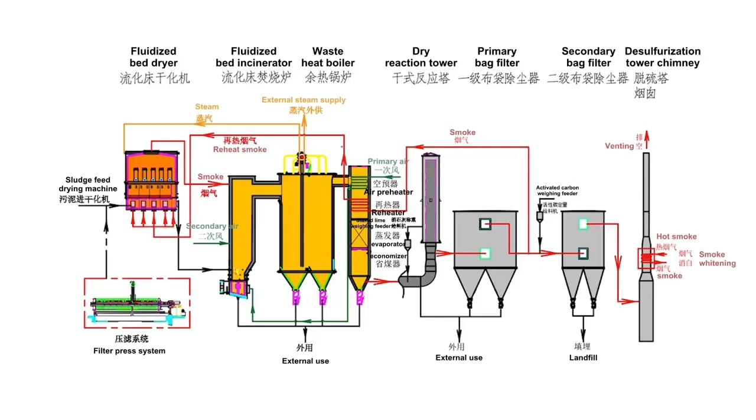Zhongding Environment, a one-stop solution provider for sludge resource utilization. The main sludge treatment process route adopts a process of drying, incineration, and flue gas treatment. The entire system process.

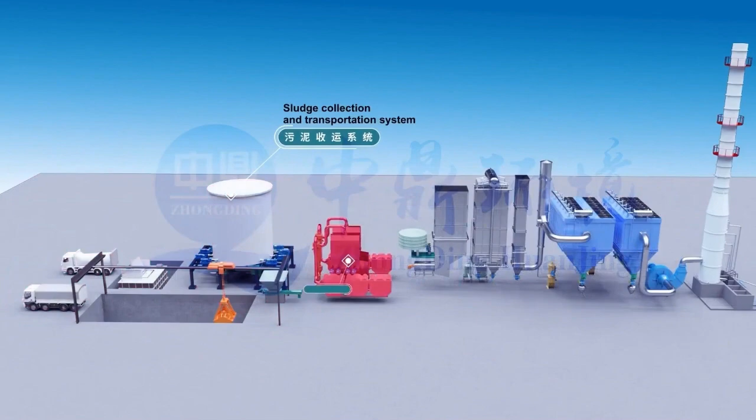Process system, including sludge collection and transportation system, sludge drying system, sludge incineration system, waste heat utilization system, flue gas purification system and more.

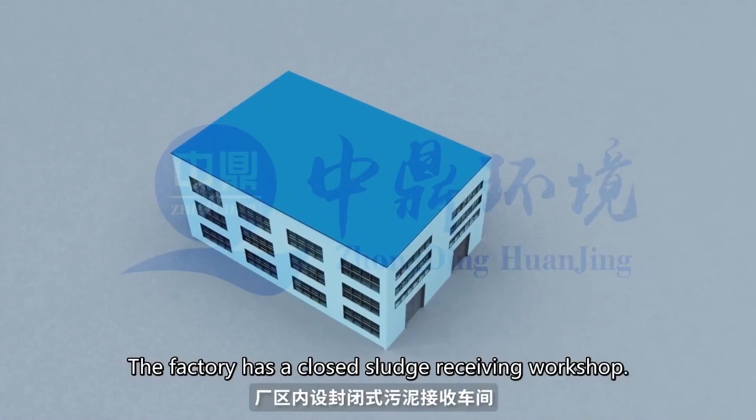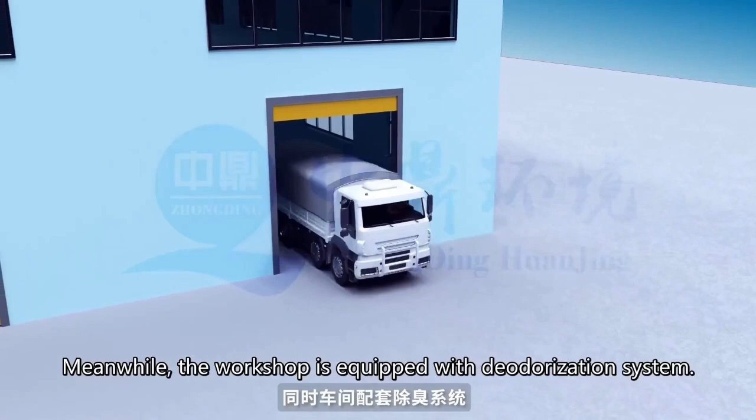An enclosed sludge receiving workshop is set up inside the factory area. Depending on the moisture content of the incoming materials, sludge collection systems are installed for both 80% and 60% moisture content, with the workshop equipped with a deodorizing system. When unloading, 60% moisture content sludge is stored in the material pit temporarily. Equipment like a grab bucket, sludge receiving hopper, scraper conveyor, etc. is used to transport sludge to the drying system.

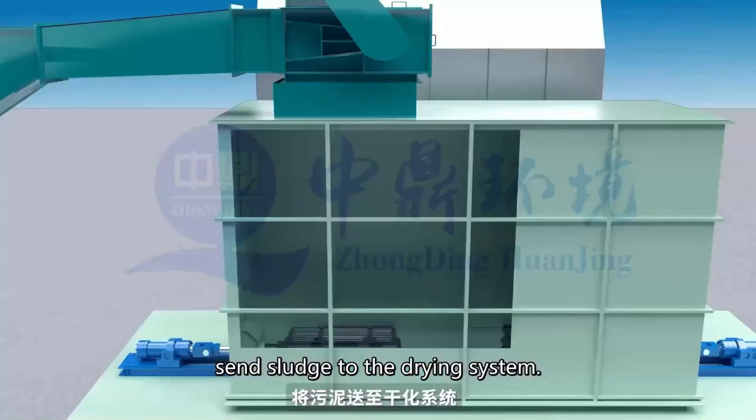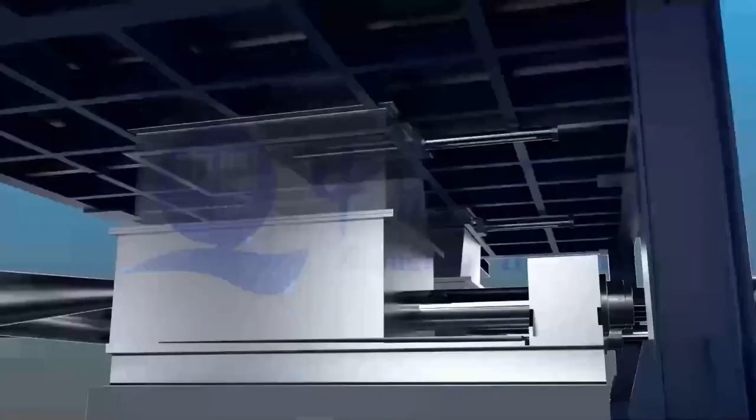Sludge with 60% moisture content requires a buffer silo with skids to ensure uniform feeding. 80% moisture content sludge is first pumped to wet sludge storage after the wet sludge receiving silo for temporary storage. Skids can be arranged in both the sludge receiving silo and sludge storage silo as required, ensuring smooth flow of sludge and preventing it from bridging. It is then pumped to the drying system.

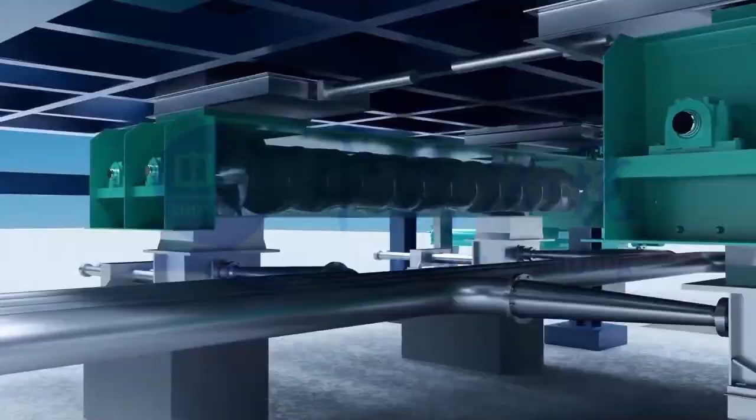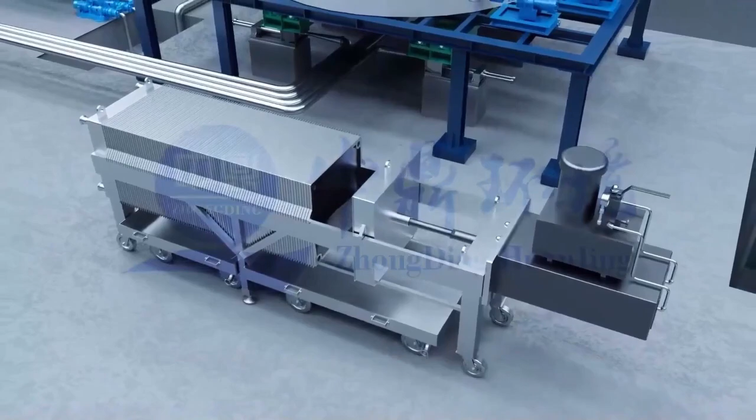According to specific requirements, wet sludge can also be transported from storage to the sludge dewatering system, then sent to the 60% moisture content collection area after mechanical dewatering. Drying system process flow.

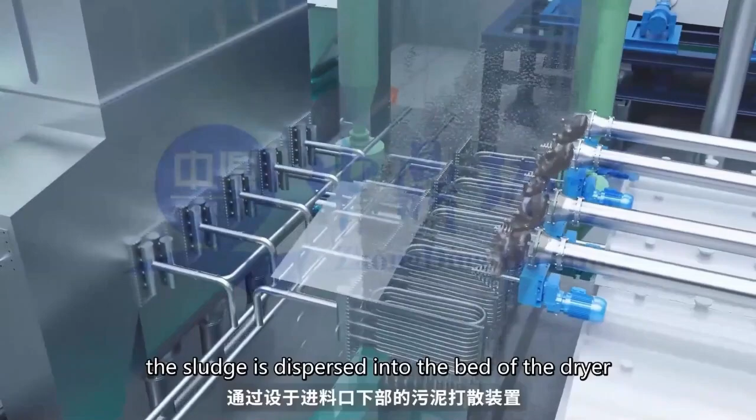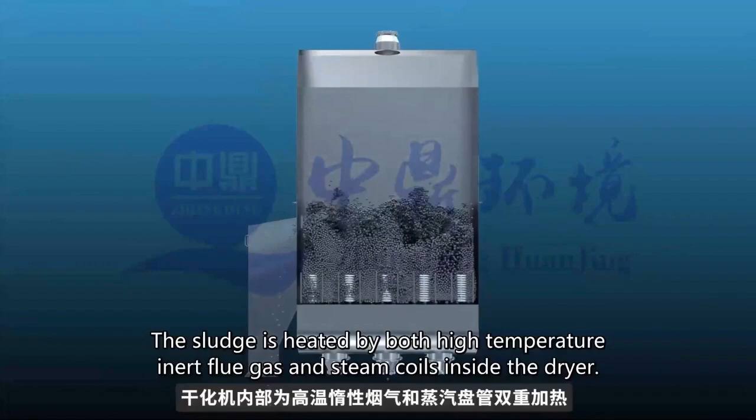After the sludge enters the drying machine, the sludge dispersing device at the lower part of the inlet disperses the sludge into the bed layer of the drying machine. Inside the drying machine, the sludge is heated by high-temperature inert flue gas and steam coils. The sludge undergoes heat exchange with flue gas by convection, and after thorough grinding heat exchange with the bed material, it dries to the appropriate moisture content.

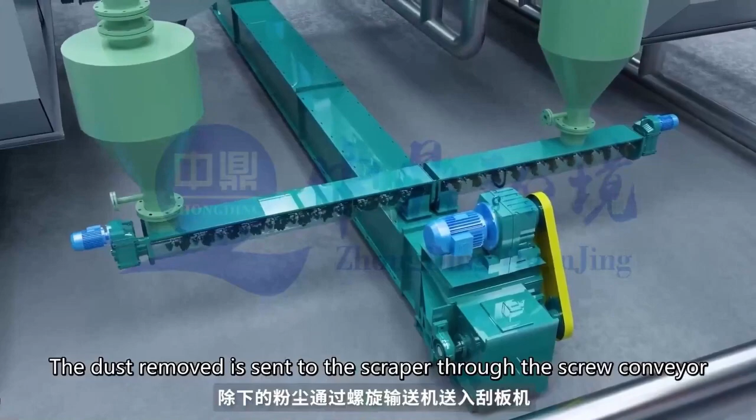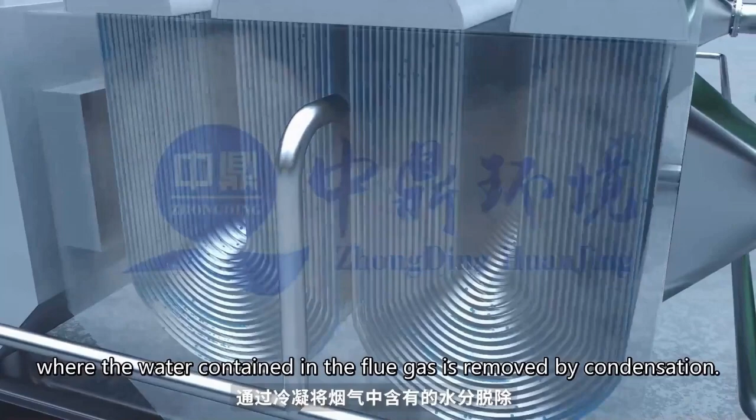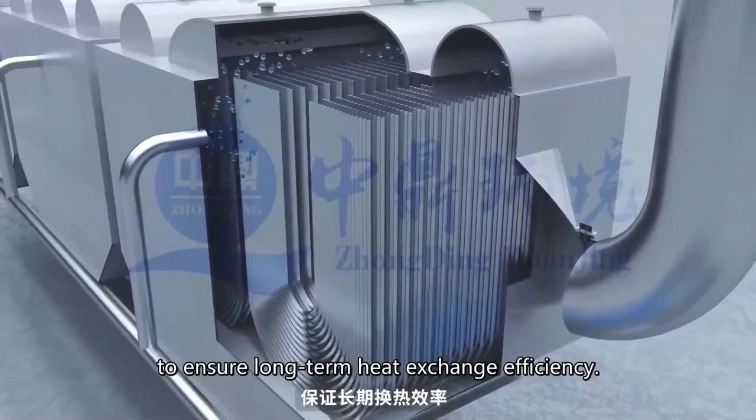The wastewater flows from the bottom of the condenser into the sewage collection tank and is pumped to the sewage treatment system by the sewage pump. The upper clear liquid of the collection pool is used by the circulation pump to flush the heat exchange pipelines in the condenser, ensuring long-term heat exchange efficiency. The dried flue gas, after removing moisture, is sent back to the incinerator for reburning by the drying induced draft fan, effectively solving the problem of foul gas emissions.

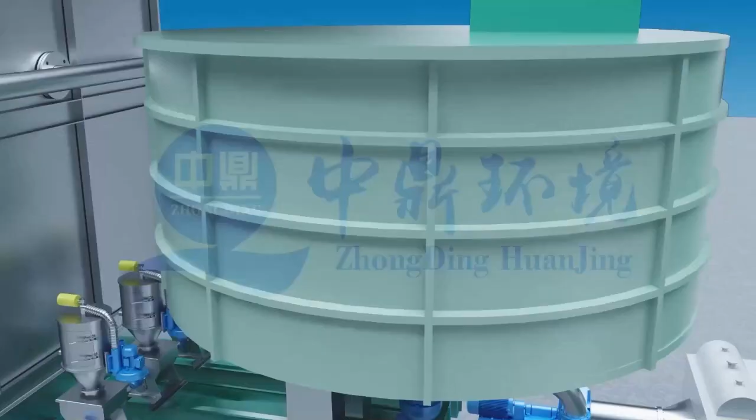After drying, the sludge flows out of the side of the fluidized bed, lifted by the screw conveyor and Z-shaped scraper to the furnace buffer compartment for dried sludge. A crushing device is placed in the high-level buffer space for dehydrated sludge, effectively preventing the rehydration and agglomeration of dried sludge. After dispersion, the sludge is transported through the screw conveyor to the incinerator for incineration.

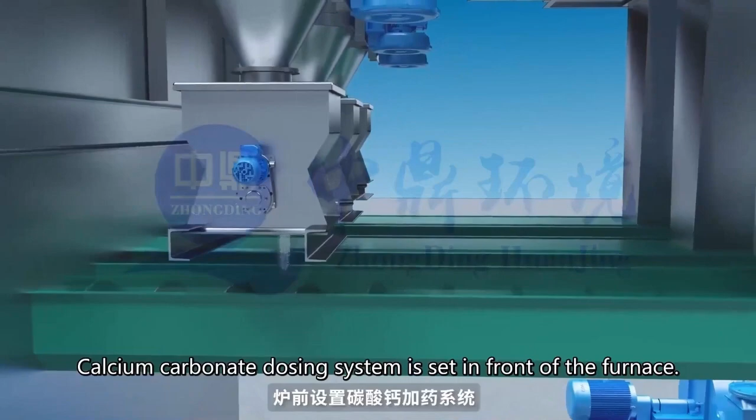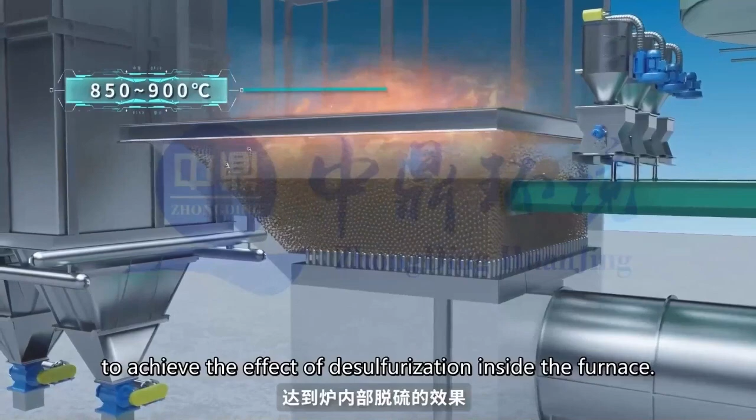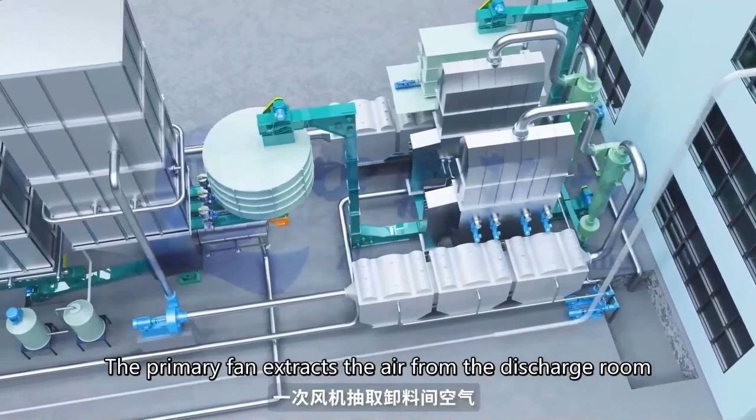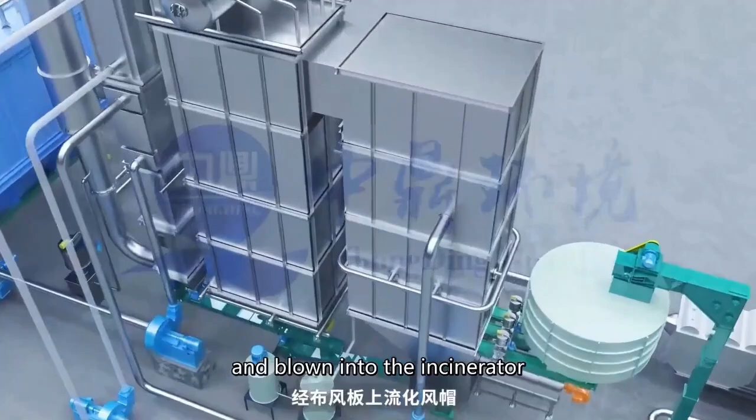The primary fan extracts air from the unloading space and sends it to the heat recovery system. The air preheater exchanges heat, warms it up, and then it is sent to the bottom sealing chamber of the incinerator. The fluidized air blown into the incinerator through the distribution plate causes the bed material to undergo fluidization. The secondary fan supplies air at the top of the bed material, ensuring thorough incineration of sludge.

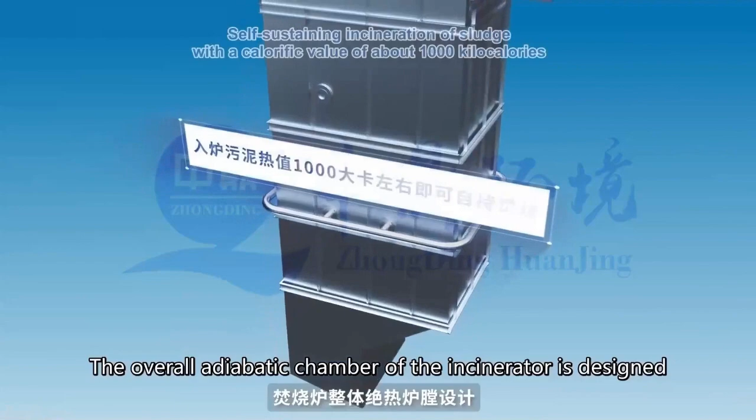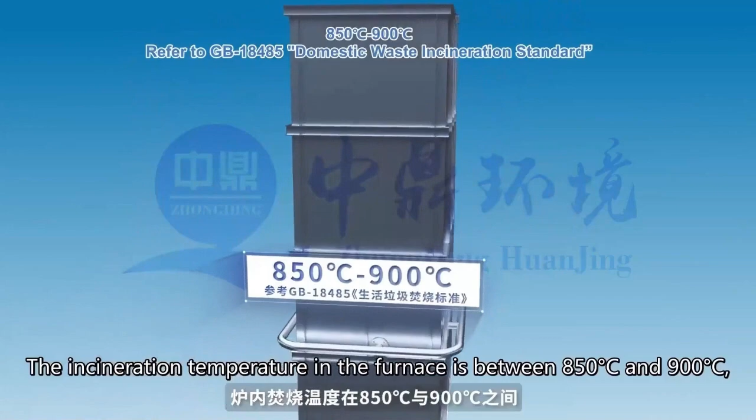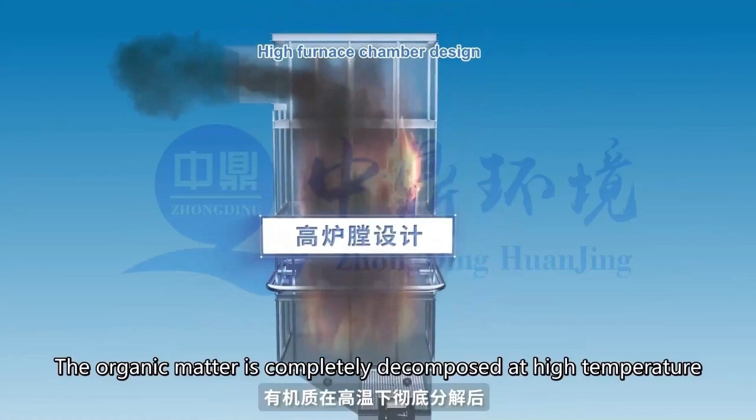The insulated furnace design of the incinerator maintains the sludge's calorific value at around 1000 kilocalories for self-sustaining combustion. The incineration temperature in the incinerator ranges from 850 to 900 degrees Celsius, meeting the national standard for municipal solid waste incineration. The high furnace design ensures that the flue gas remains for over 2 seconds, then discharges from the upper outlet after complete organic matter decomposition at high temperatures in the fluidized bed incinerator.

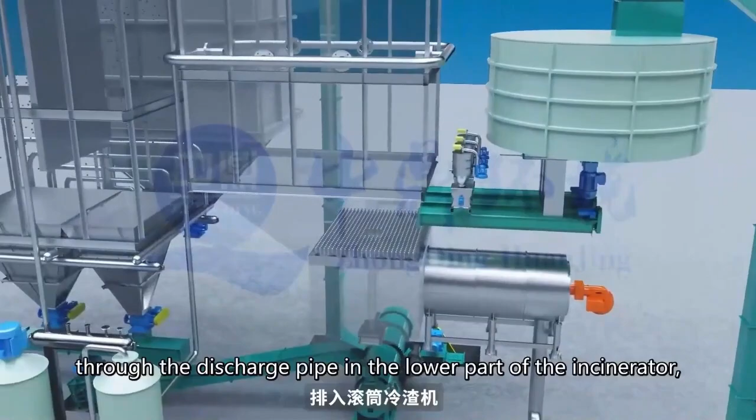An SNCR denitrification device is installed at the furnace outlet, using urea solution to eliminate nitrogen oxides from the flue gas. Slag is discharged into the drum slag cooler via the lower discharge pipe to cool it to below 100 degrees Celsius, then transferred to the storage bin for reuse in bed material, brick making, cement production, and other resource applications.

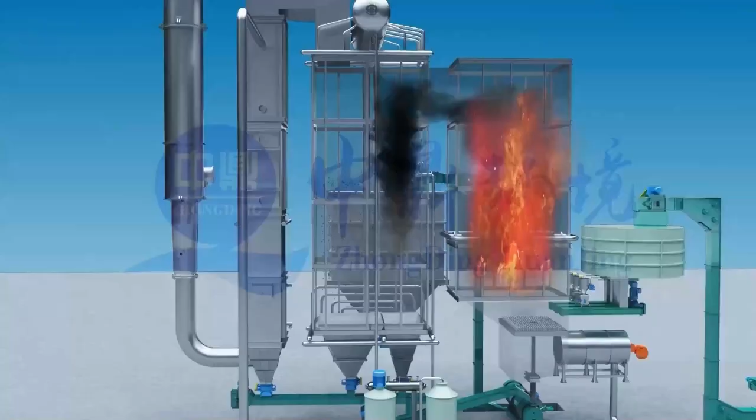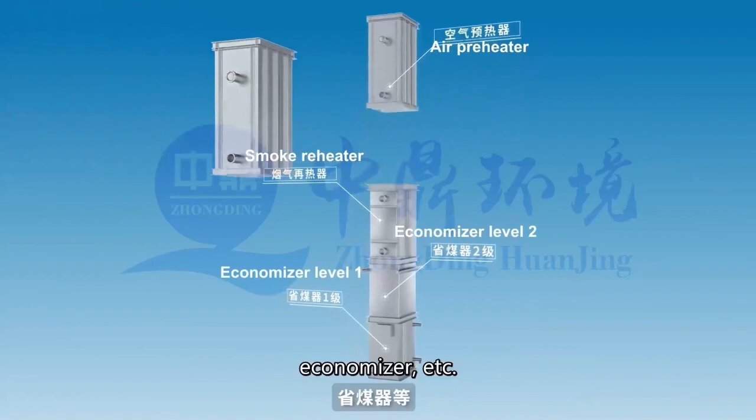The high-temperature flue gas enters the waste heat boiler to recover heat and generate steam. Some of the steam is used for steam-assisted drying in the front-end fluidized bed dryer, while the remaining steam can be used separately by the owner. The flue gas goes through the rear multi-stage heat exchange system of the waste heat boiler to completely recover heat, including air preheater, flue gas reheater, evaporator, economizer, etc. And a position for an SCR system can be reserved. Flue gas treatment system process.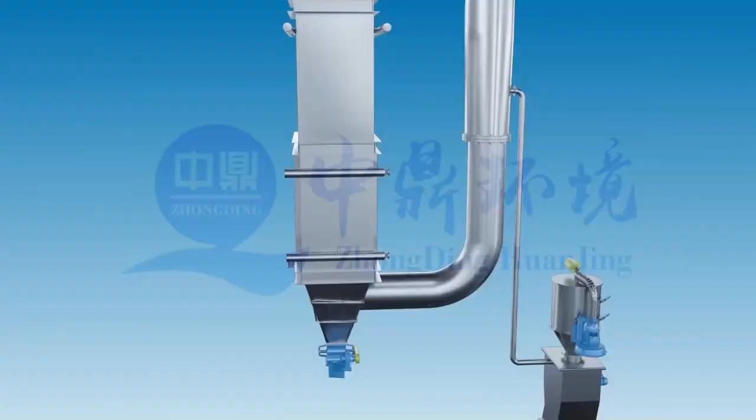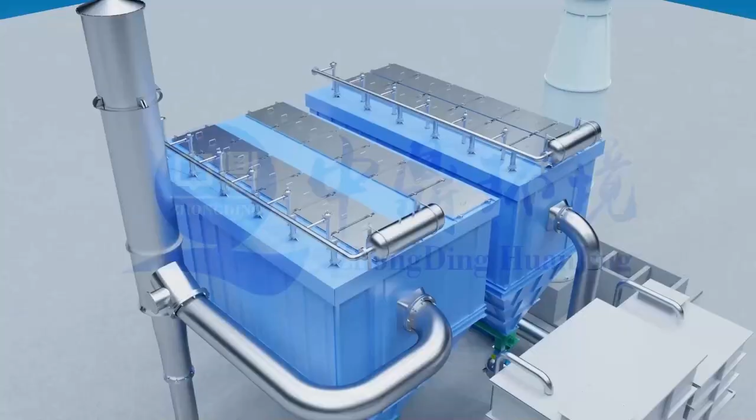Finally, the flue gas at temperatures below 200 degrees Celsius is directed into the dry reaction tower, where lime powder is used to neutralize the acidic substances in it. The flue gas, laden with dust and having undergone desulfurization, is discharged from the dry reaction tower and enters the bag filter. The bag filter is divided into two stages. The initial stage of the bag filter eliminates 99% of suspended particles in the flue gas.

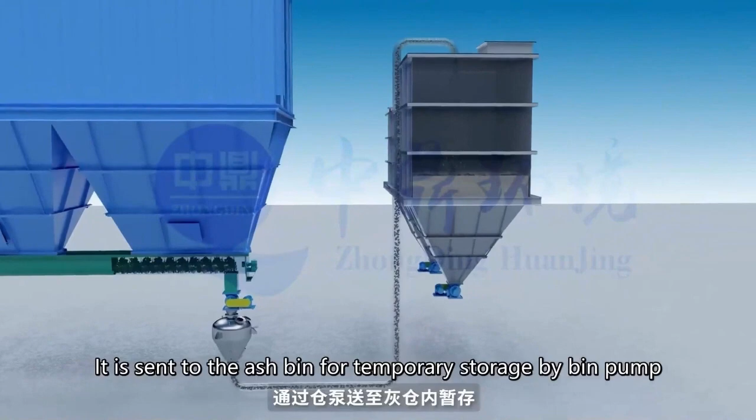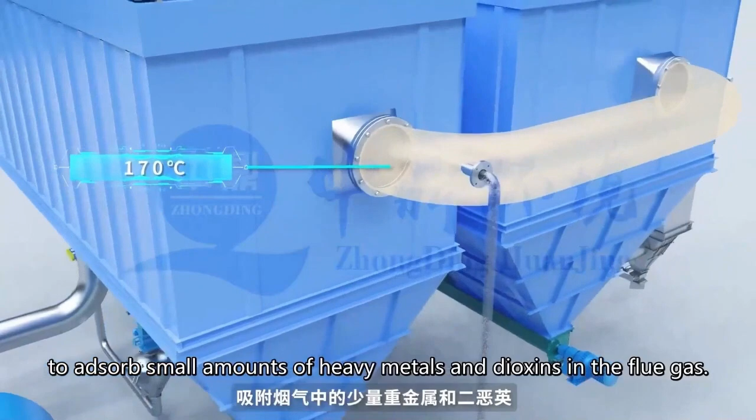The dust collected is commonly recognized as general solid waste, sent to the ash warehouse through the pump for temporary storage, and can be utilized in making bricks and cement. At the entrance of the secondary bag, activated carbon is added to the flue to adsorb trace heavy metals and dioxins in the flue gas. The secondary bag aims to eliminate very small particles in the flue gas. Fly ash is generally identified as hazardous waste, sent to the hazardous waste ash warehouse for storage and treatment.

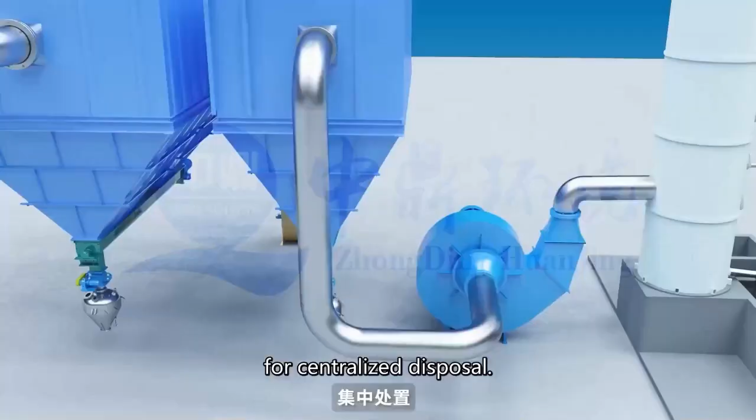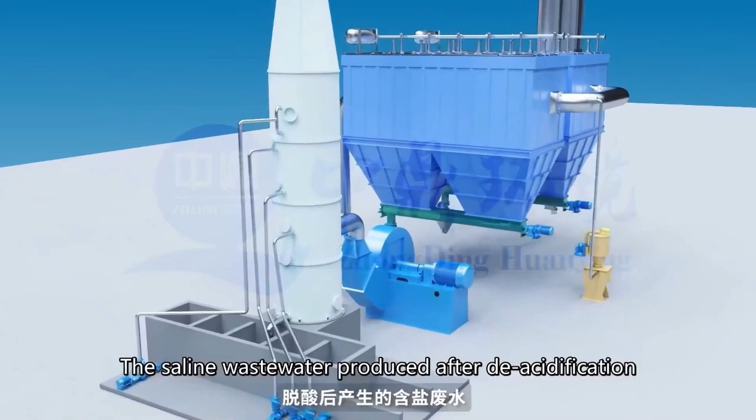The flue gas from the secondary bag is sent to the wet desulfurization tower by the induced draft fan, where the desulfurizer is continuously sprayed to achieve final desulfurization. The purified flue gas is emitted via an integrated chimney above the desulfurization tower, meeting ultra-clean emission standards. Salt-containing wastewater from desulfurization is pumped by sewage pumps to the sewage treatment system.

Some of the flue gas is extracted from the duct before entering the secondary bag filter. The flue gas sent by the boosting fan is heated in the reheater of the waste heat utilization system, and then sent to the drying system as the fluidizing air for the dryer. Thus, a large circulation of drying flue gas is formed within this process system, fully utilizing the internal waste heat of the system to ensure high recovery and low energy consumption throughout the system.

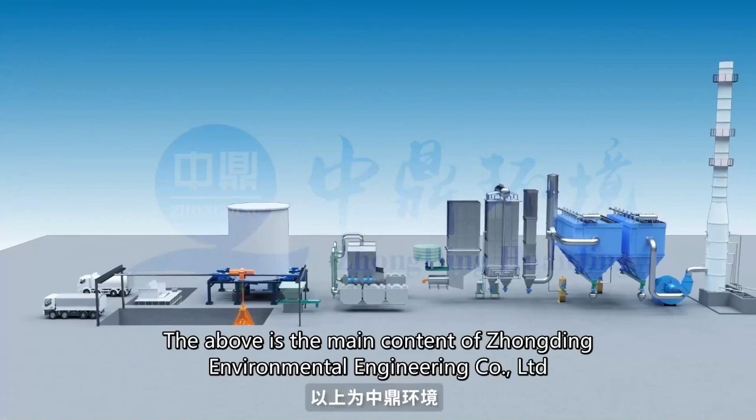The above is the main content of Zhongding Environment's sludge drying and incineration technology.